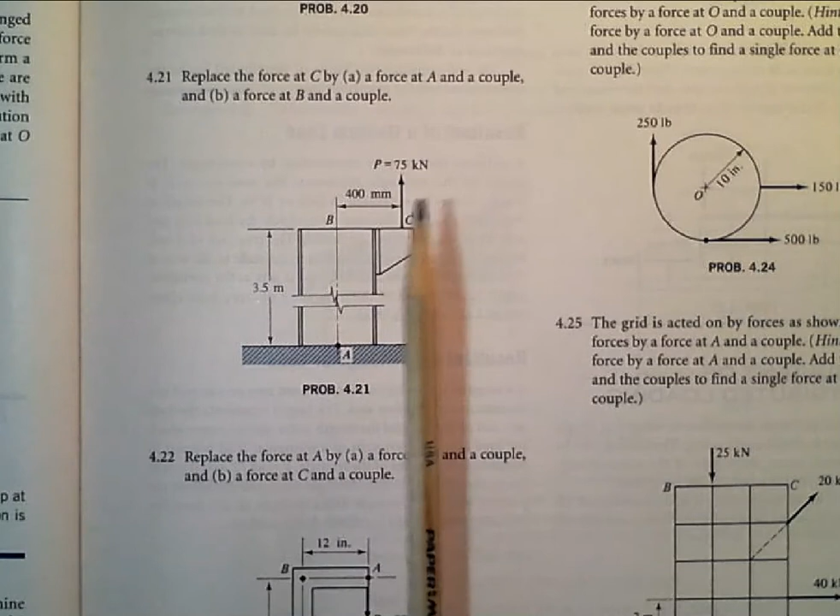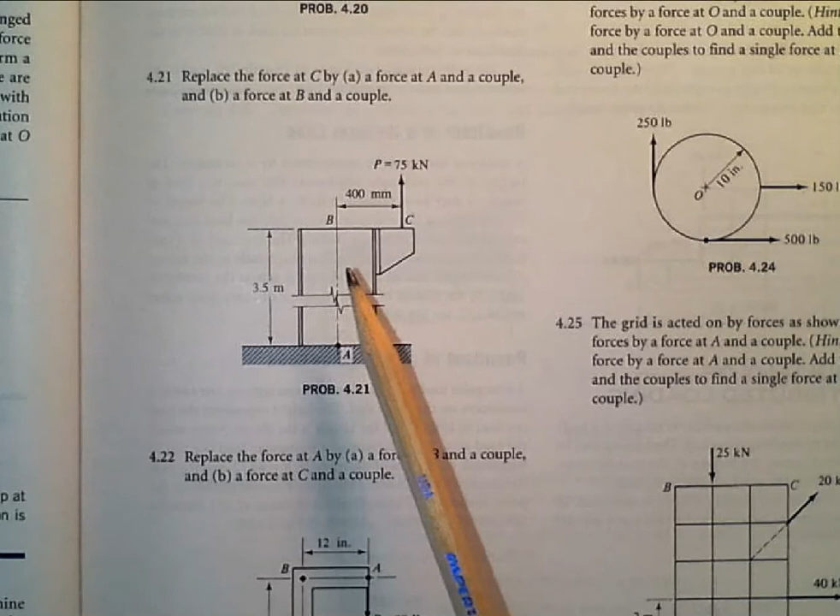It's got a load of 75 kilonewtons on this. What they want us to do is replace the force at C by a force at A and a couple, and at B, a force at B and a couple. I'm going to take a short break to put this in the homework format on my sheet, and I recommend you do the same and follow through with the problem with me.

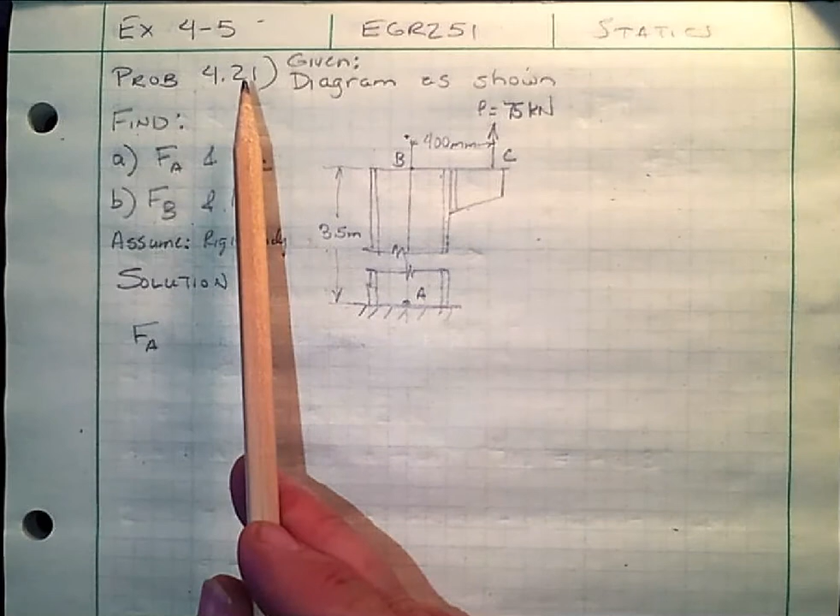All right, so I've set up the example using the homework format. It's 4.21. Given information, the diagram that's shown. This is a column made of an I-beam, very likely—that's why the lines are here on the edge. And this is an arm extending out, probably done with an angle bracket. Again, that's why that piece is shown there.

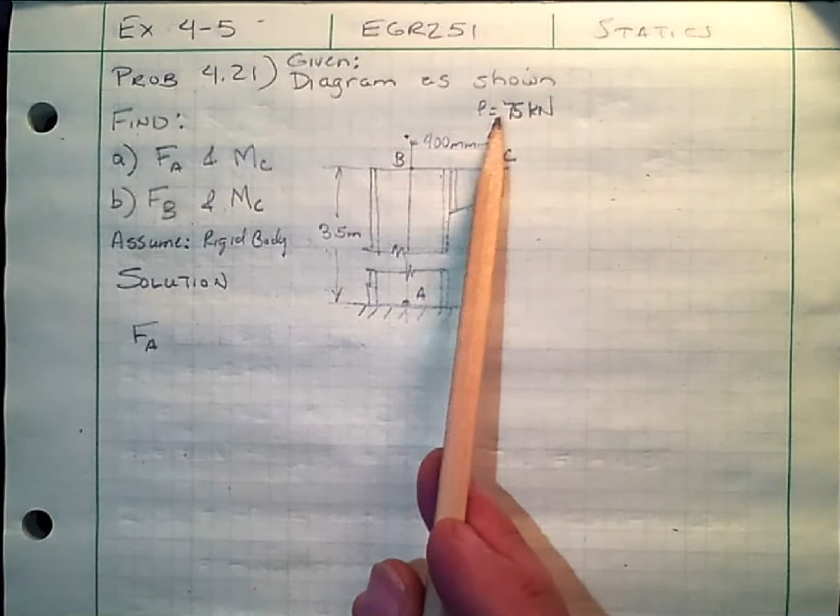We have a force P over 400 millimeters from the center line AB, shown with this break symbol because this is not drawn full to scale. So this will be 3.5 meters long. This is used as a drawing convention when you have very long items that you don't want to show in full scale.

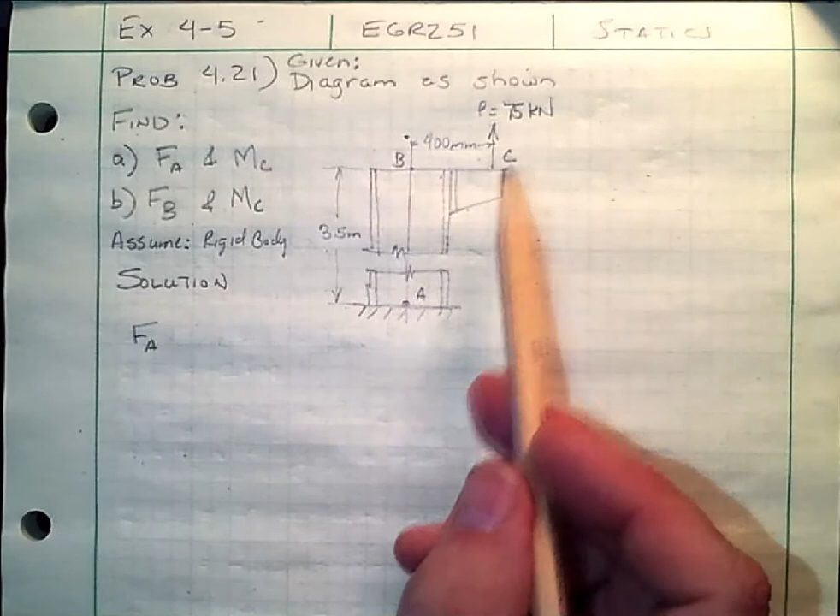Solution is to go through and replace the force at A. Essentially, you're just going to move this force over. So FA is just going to be equal to 75 kilonewtons. And in terms of the moments, we're doing our moments about point A to determine what the couple is going to be equal to. Because we now moved the force over there, we now have a 75 kilonewton force.

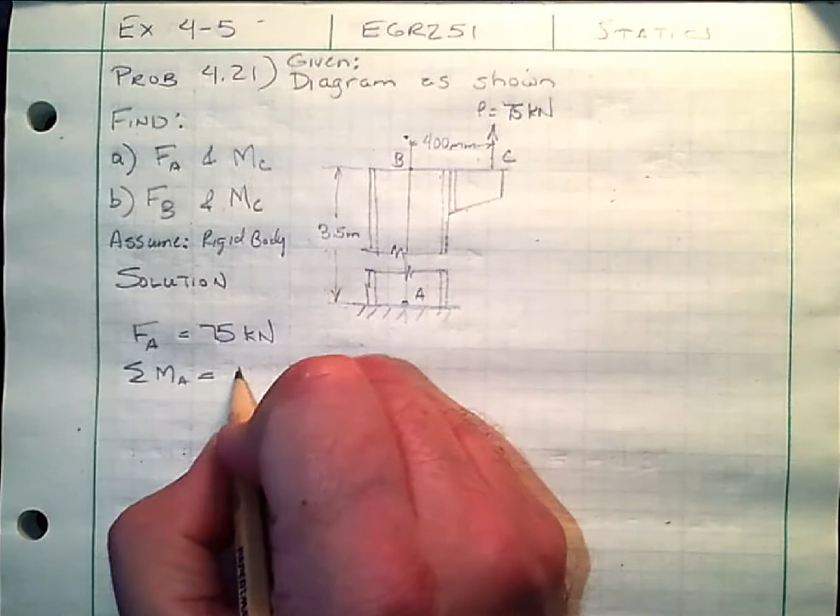So how would you go about doing this? Well, it's a vertical force, 75 kilonewtons. Keep in mind, because it's a vertical force, we're really only looking for the horizontal distance, so we're not worried about this 3.5. We're going to use our 400 millimeters. Lastly, when we take a look at this, it is going to cause a counterclockwise rotation—that's pushing up and over, so that is going to cause a counterclockwise rotation.

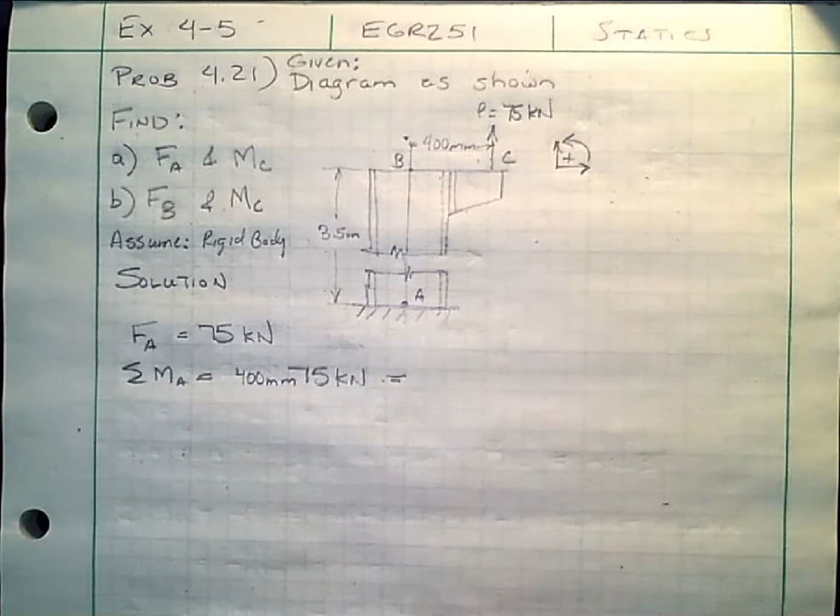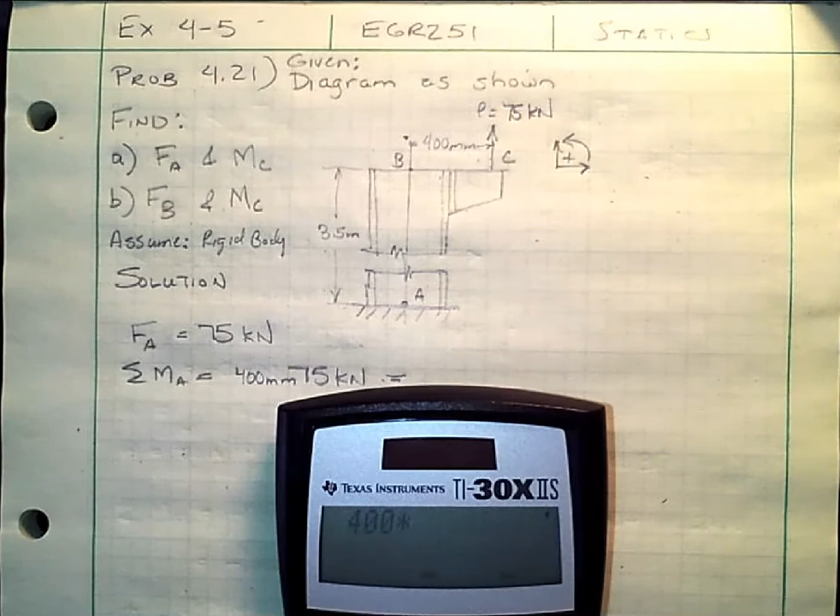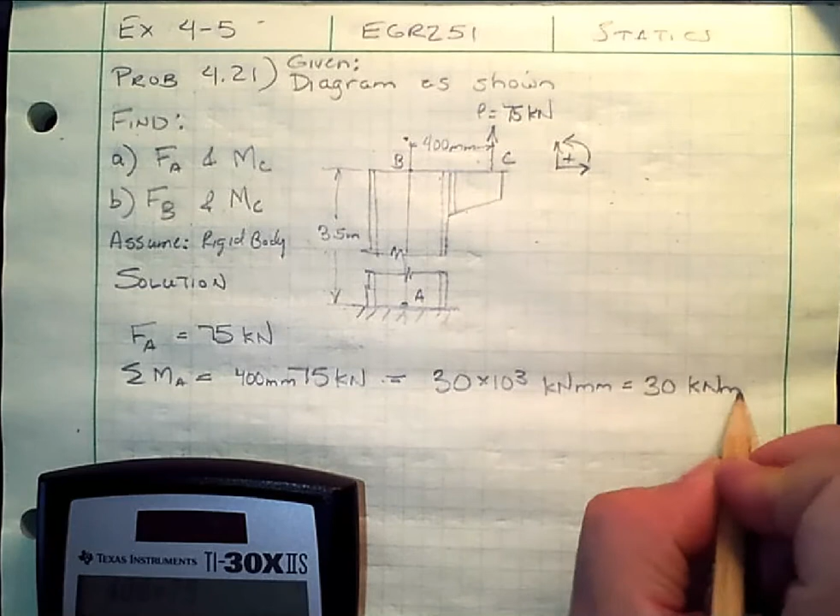And as we said from our sign convention, counterclockwise is positive. So in this case, we're just going to multiply these two together. It's already positive. When we do that, 400 times 75, we get 30 times 10 to the 3. So that's 30 times 10 to the 3, and that's already kilonewton millimeters. So it's probably easier to write this instead as 30 kilonewton meters—wipe out that millimeters by that 10 to the 3. So there's our answer.

We have that's going to be equal to MC. So for 4.21 part A, we have F sub A equals 75 kilonewtons, and the moment couple is going to be equal to 30 kilonewton meters.

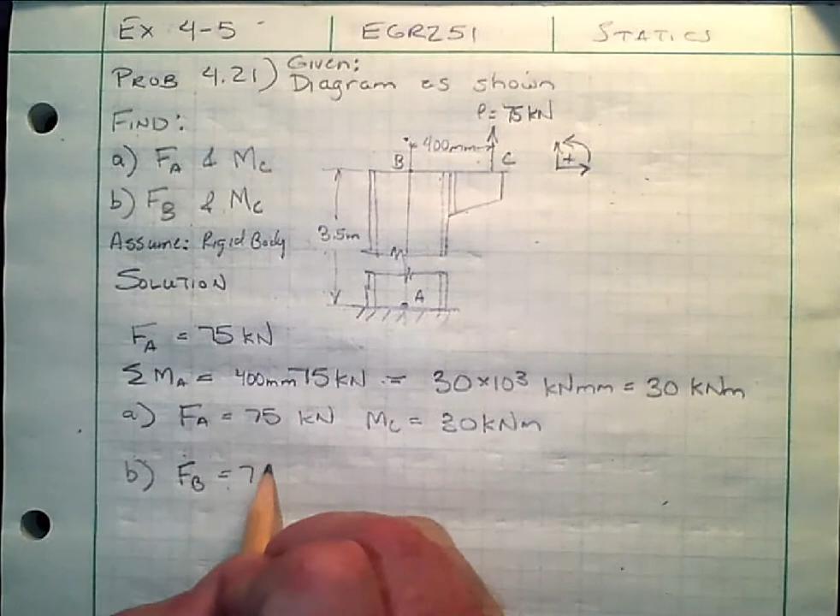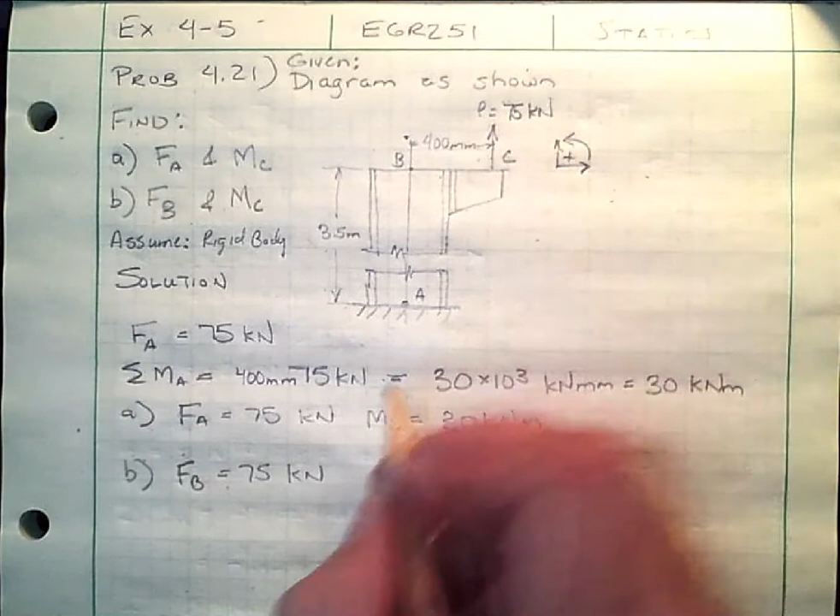By the way, for part B, the fact is the force is unchanged, so FB is still going to be 75 kilonewtons. And again, the vertical position is not important—because this is a vertical force, we're only worried about the horizontal distance. So it will turn out that the moment couple will still be 30 kilonewton meters.